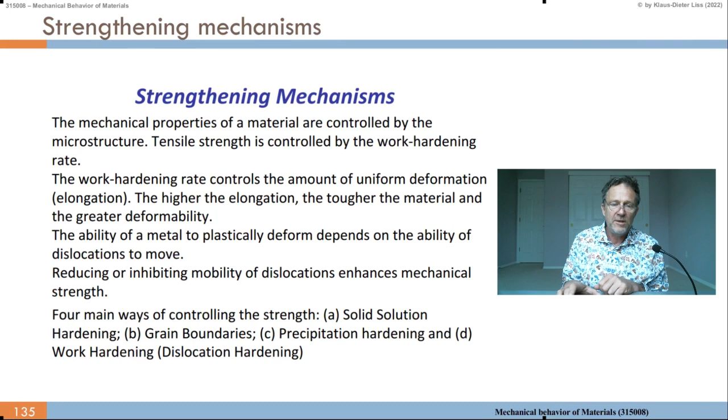Today I like to emphasize the dislocations. So how to achieve the highest strength? First of all, we can eliminate all defects, because if there's no defect in the material, like in a whisker, in a single crystal, then we first have to nucleate a dislocation, and that nucleation needs to overcome some energy barrier.

Crystals without defects and of very high strength have been achieved in whiskers. Whiskers are flaw-free materials with cross-sections of the order of a few microns, and they are some of the strongest materials produced by man. Some representative examples are provided in Appendix 1 of this publication, Strong Solids.

There are iron whiskers, for example, where the experimental strength sigma is 12.6 gigapascal. There's a patented steel wire with 3 to 4 gigapascal strength. Then we have the strongest bulk material steel at about 2 gigapascal. And most conventional steels have strengths in the megapascal regime.

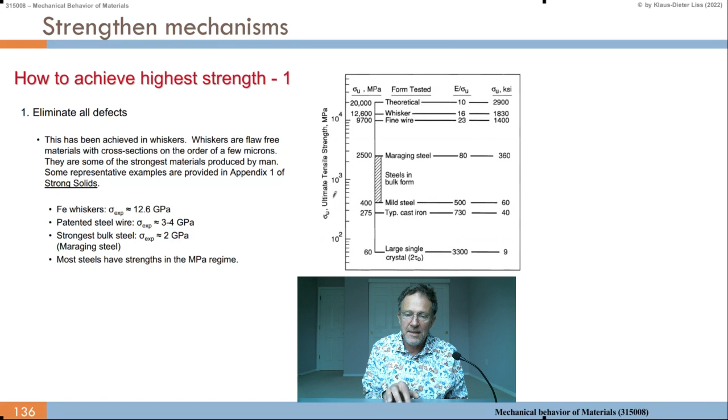That is also shown here in the table to the right, where we list for various metals, on the logarithmic scale to the left, sigma u, the ultimate tensile strength in megapascal. We see a large single crystal has a UTS of 60 megapascal. Then the typical cast iron is 275 megapascal. The mild steel is higher, 400 megapascal. And now we come to the Maraging steels, which are martensitic high-strength steels in bulk form, and they can spread between 400 and 2500 megapascal.

So here we go into the gigapascal regime. A fine wire can have 9700 megapascal, so 9.7 gigapascal. The whisker has 12.6 gigapascal. And the theoretical limit, I think for steel, is 20 gigapascal. We know the theoretical limit is not achieved because we get dislocations.

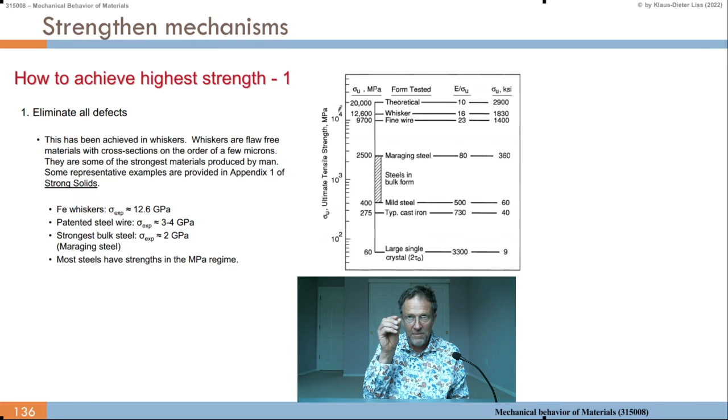As said, the whisker is some of the strongest material, because we have a relatively thin wire-shaped crystal and need to nucleate dislocations at the surface. If we look at the surface to volume or surface to cross-section ratio in the whisker, we have a large surface energy, and therefore the nucleation of dislocations requires large activation energy, so we get high strength. In the single crystal, once we have a dislocation per area or per volume, the surface does not play so much a role, and that's why large single crystals have a small UTS. If you compare 1 over UTS times the elastic modulus, we get those numbers here, and the smaller the better.

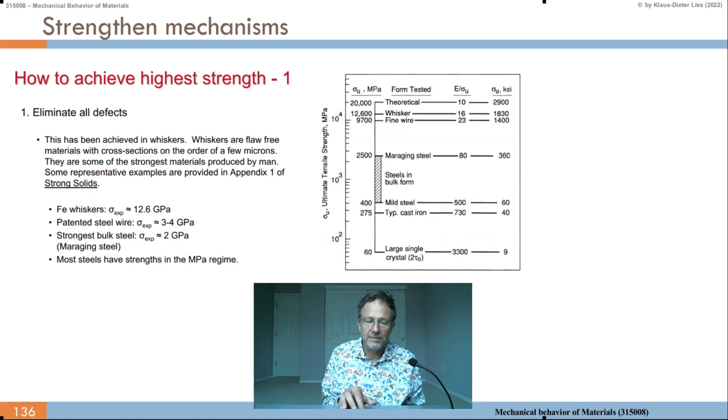The strengthening mechanism is we create so many defects in the crystal that they interfere with each other, for example dislocations. The principles behind strengthening mechanisms are work hardening, precipitation hardening, solid solution hardening, and transformation hardening. In work hardening, if we have a crystal lattice within the microstructure, then we get dislocations here and there.

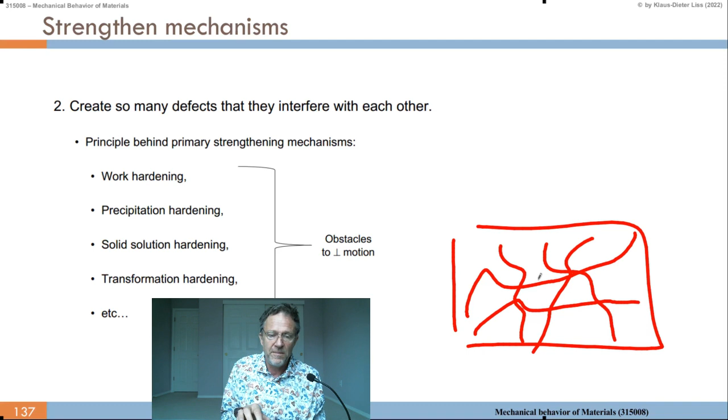Eventually the dislocations interact with each other. We know they repulse or attract each other, so they align, and when they cross each other, you need some energy to overcome. Eventually these dislocations entangle and cannot move anymore, or it becomes more unfavorable energetically to move.

We can also put precipitates into the crystal lattice. If we have a dislocation line coming through and moving in this direction, it cannot move over the precipitate, or it needs a lot of energy to go over it. Sometimes it has to climb, and we know climb at room temperature is difficult. It has somehow to go around.

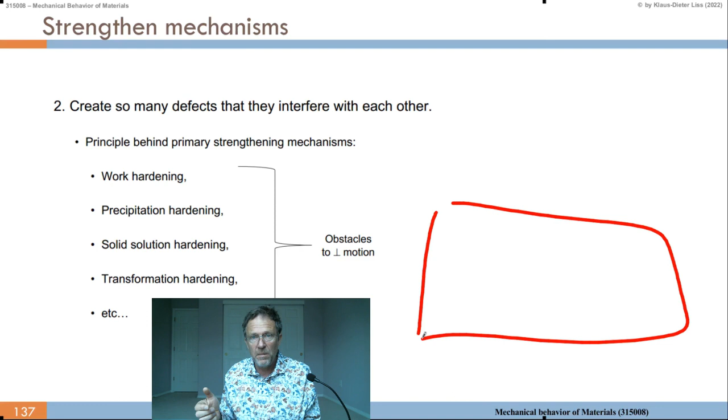Then we have solid solution hardening. We can have a solid solution, dissolving some impurities in the alloy. If we have iron, we can put carbon in, and then we have a dislocation. The carbon goes on interstitials, so the carbon will precipitate into the strain field of the dislocation. It accumulates around the dislocation, because if you expand the lattice, where you have a tensile strain, you have more space in the interstitials, and that's where the carbon would go.

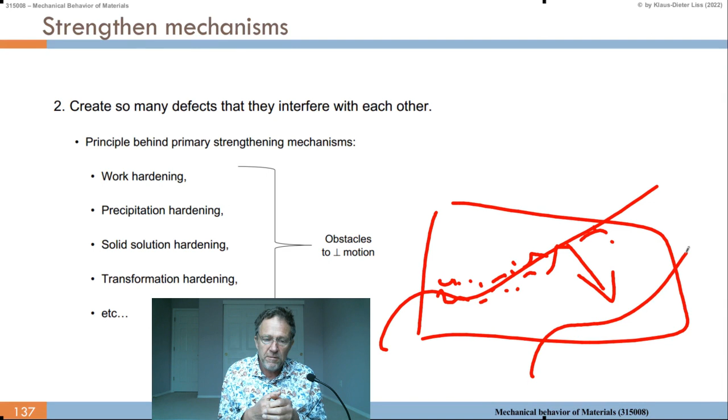So now, if you want to move the dislocation, you first have to overcome this cloud of solutes, which move by diffusion. By mechanical movement of the dislocation, by shear, you need to overcome this widened lattice, which you may want to compress in the next state as the dislocation moves on. That's more difficult because there's carbon sitting, so it's harder to move.

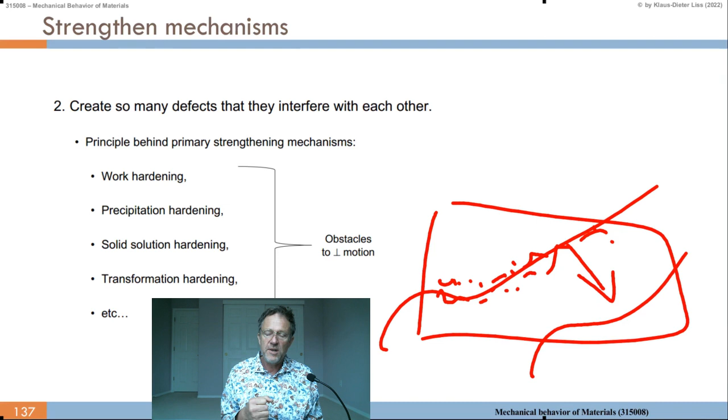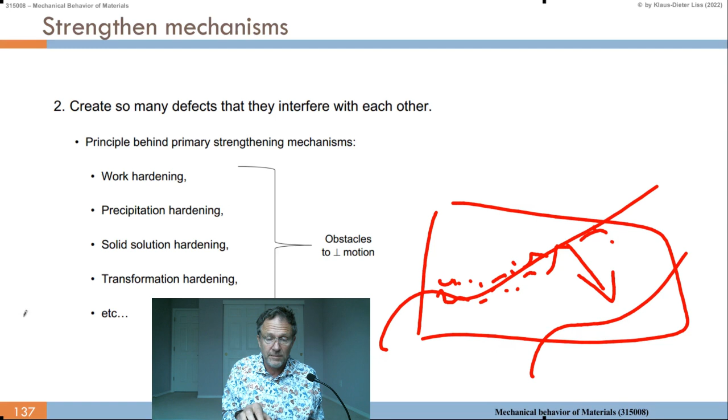Then there's transformation hardening. We can have phase transformations, like martensitic phase transformations I mentioned already, where we change the crystal structure. Grain boundaries also play a role. So the general rule: the strengthening of plastic deformation in crystals results from the restriction of dislocation motion.

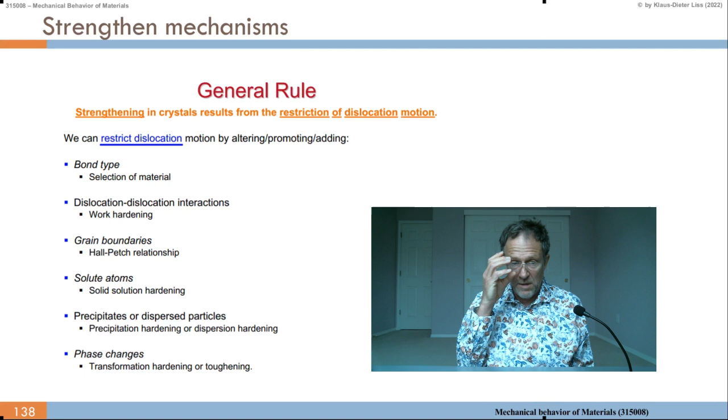We can restrict the motion by altering, promoting, or adding the bond type. If we have an FCC lattice, aluminium, and then we say okay, we take titanium aluminium, then we have titanium aluminium intermetallic bonds, and they make the material stronger than pure aluminium. So you select the bond type.

Then we have the dislocation interaction, which is the work hardening I mentioned already. Grain boundaries: the grain size plays a role, because if the grain is smaller, you have more grain boundaries in a given volume. That gives the Hall-Petch relationship I will talk about.

Solute atoms, I just mentioned in the slide before. Precipitates or dispersed particles: you put something in where the dislocation has difficulty going around. And phase changes: transformation hardening or toughening of material.

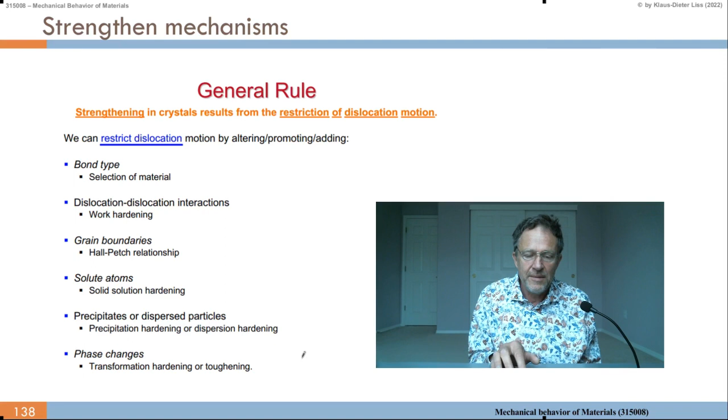How does bonding influence the strength? In this table to the left we have the weaker bonds, and here the stronger bonds. We know already the strongest bond is the covalent solid, like in silicon, like in gallium arsenide, and so on. Then I mentioned the intermetallics, titanium aluminide, which is between the metal bond and has some covalent character.

Then weaker, we have the ionic solids, so it's not the bond which plays a role, but the electrostatic repulsion and attraction between dissimilar and similar ions. We have the close-packed metals, which are the weakest, because these are just spheres packed together. The other metals may be a little stronger than the close-packed metals, because close-packed is just spheres. In FCC and HCP close-packed structures, the bonds are essentially non-directional, so the dislocation motion is easy. Examples: FCC metals like aluminium, nickel, silver, gold, all your favorite metals.

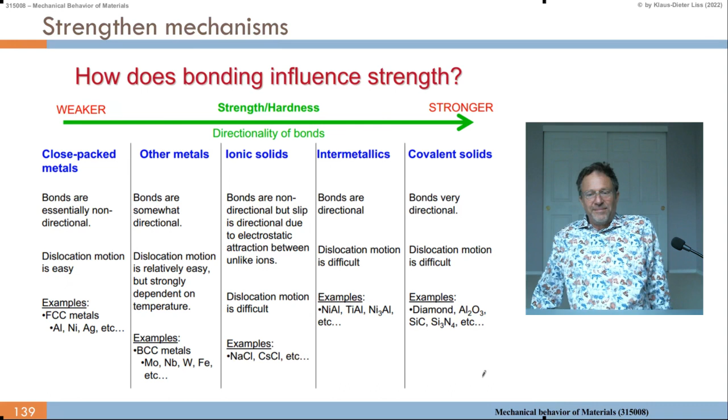So let's look at the general model for strengthening. There's a nice reference I gave here by L.M. Brown on strengthening mechanisms in crystals from 1971. Consider a slip plane that contains a random array of obstacles - we don't care at the moment what the obstacles are.

So we have the obstacles, which are the blue dots here on the slip plane, and then we have this dislocation line. Imagine a dislocation line at the bottom, which moves up in this direction under an applied shear stress tau, and eventually it hits the obstacles, getting pinned there.

Between the obstacles it can still move forward, but it remains pinned. So the dislocation line becomes longer because of the curvature - it bulges out, wanting to go toward the top of the graph, and it gets curvature and an angle in between.

So we need extra work to move the dislocation through the array of obstacles, and this results in a higher stress required to cause flow.

You can analyze that quantitatively by looking at the effective particle spacing and the critical angle to which the dislocation bends prior to breaking away from the obstacle. When the angle becomes too sharp, the two parts come together again, forming a new dislocation line and probably a ring of dislocation around the obstacle.

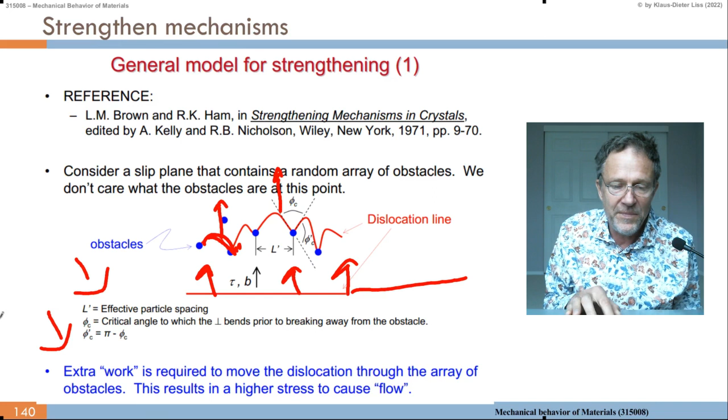So let tau be the shear stress - the flow stress required to move the dislocation through the array of obstacles, as shown here. This allows us to define stress in terms of the strength of the obstacle inhibiting dislocation motion: strong obstacles resist dislocation motion, while weak obstacles provide little resistance.

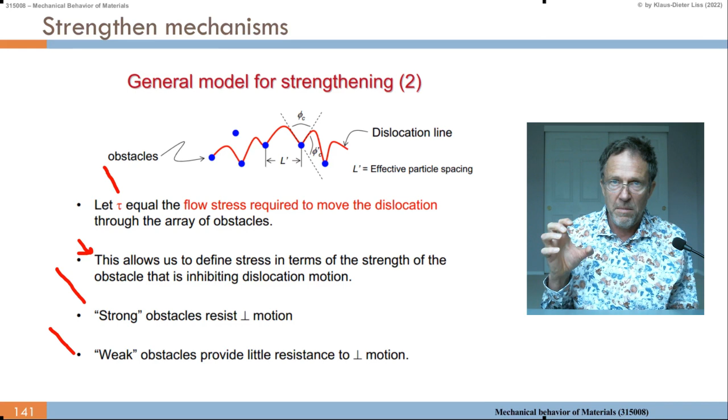A vacancy may act as an obstacle, with a little crystallographic potential for the dislocation, but it's relatively weak, so the dislocation just moves through it. A single solute atom is also relatively weak. But if you have a big particle sitting there, it's really hard for the dislocation to go around.

Here's a summary of the hardening and strengthening mechanisms for crystalline solids. Again we have the typical aspects: work hardening, the nature of the obstacle - here, other dislocations. Dislocations interact with other dislocations - they repulse each other, entangle each other, may attract each other, and it's relatively strong.

And the hardening law: delta tau, the increase in hardening shear stress from the undistorted material to the hardened material, equals alpha times some constant. Alpha equals about 0.2 for FCC metals and about 0.4 for BCC metals - this is a constant we can calculate, estimate, or determine empirically.

Then we have the shear modulus, of course, and the Burgers vector - for a larger Burgers vector we need larger shear force. And then it goes with the square root of the dislocation density, rho, which you see here.

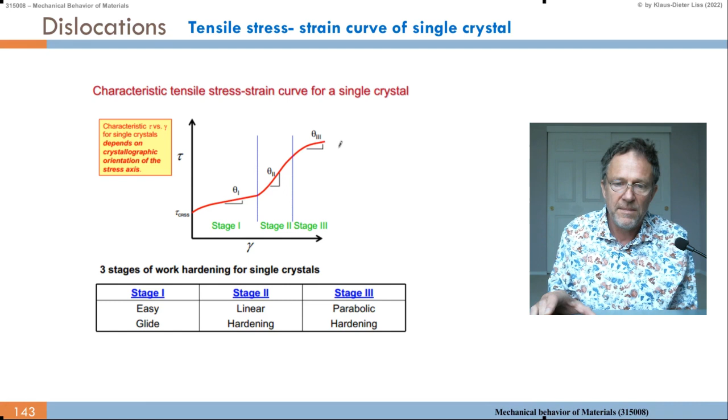The same is shown in this figure. Stage 1 is easy glide with a single slip system. Stage 2 has a high constant hardening rate, with multiple slip systems, nearly independent of temperature and strain rate. Then stage 3 has a decreasing hardening rate, with cross slip, and is very sensitive to temperature and strain rate.

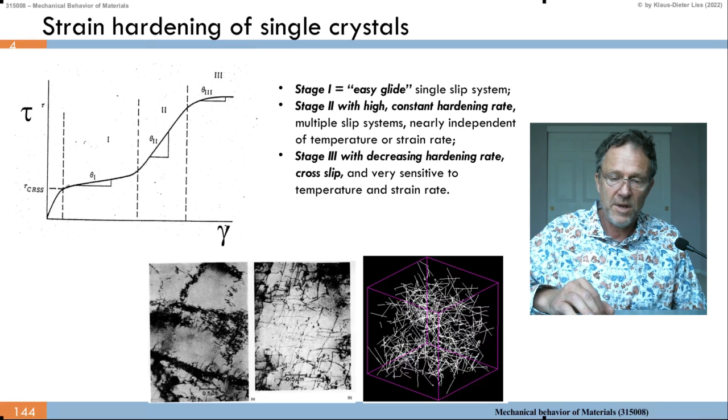This is because we may need some climb of dislocations to go around each other in this big entanglement, this spaghetti. To go around each other you need diffusion, or may need some diffusion aspects. So if you go to a higher temperature, it may become much easier than at lower temperature.

The ability of a metal to deform depends on the ability of dislocations to move - that's what we're talking about. Restricting dislocation motion makes the material stronger; not much new here in this slide. Ordinarily ductility is sacrificed when an alloy is strengthened - also evident, right?

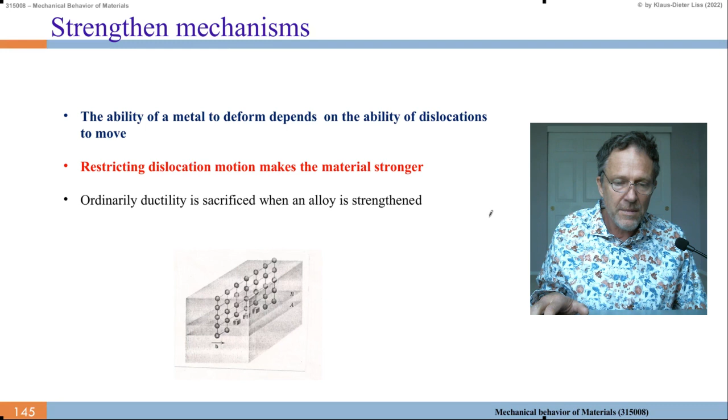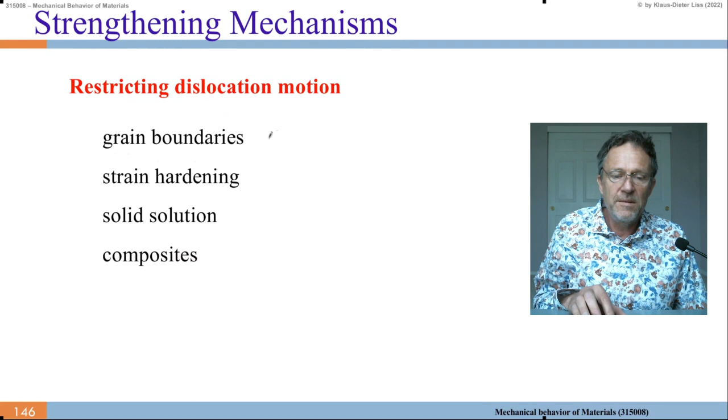Ordinarily, ductility is sacrificed when the alloy is strengthened. Let's look at restricting dislocation motion by grain boundaries, strain hardening, solid solution, and composites. Let's go to the grain size effect, where we look into the pile-up mechanisms of dislocations.

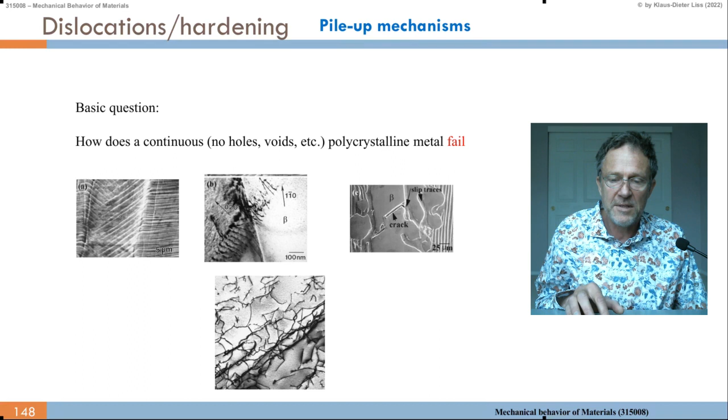Basic question: how does a continuous polycrystalline material fail, which has no holes, voids, etc.? We get the introduction of dislocations, maybe also twin planes, and they accumulate, eventually forming micro or nano cracks where dislocations concentrate. These planes or regions of high concentration of dislocations make it very hard for dislocations to move. If you further apply shear stress, it may lead to a crack—first a nano crack, and then they can grow to larger macroscopic cracks.

So we need to accumulate the dislocations in the grain boundary. Let's say this is a grain, and it has a typical diameter D. If you put a Frank Read source here—you know the Frank Read source, which expels dislocation loops—these dislocation loops move out, and the next one follows, and the next one follows.

How far can they move? The first dislocation can move until it hits the wall, until it hits the grain boundary. Then the next dislocation comes and lines up behind the first, either at 90 degrees or 45 degrees, depending on the sign of the dislocation. They attract each other and line up in lines—we have seen this, these dislocation walls, studied maybe two lessons ago.

How far can it move? Until it comes close to the first dislocation. If it comes too close, the energy of the two dislocations becomes larger. If you put one dislocation with double the Burgers vector in, the energy becomes 4 times larger, since energy increases with the square of the Burgers vector. So if you put two lattice planes together, the Burgers vector would be 2b, and the energy would be 4 times the energy for one dislocation.

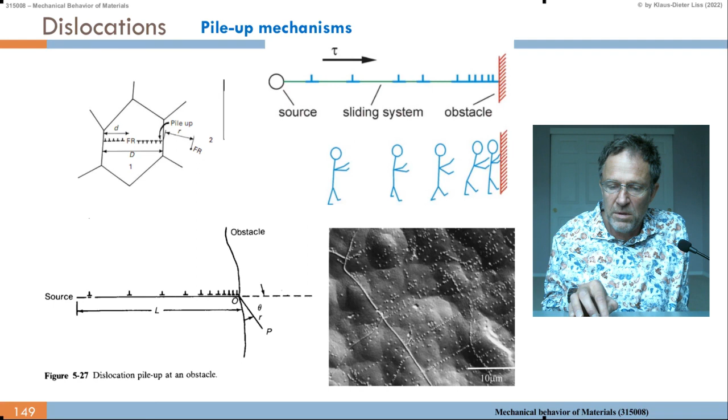So if you have a number n of dislocations in a pile-up of length L at a planar boundary, remember that tau is proportional to G times B over R. We construct this giant dislocation of many Burgers vectors, and we get n times GB over L. So here it's not a radial function anymore, it's a linear function, depending on 1 over L, not 1 over R, decorated by geometric terms: pi times 1 minus nu times L in the denominator.

But this is proportional to GB over R, and now we have G times n times B over R, and the geometric factor is pi times 1 minus nu over L, because now it's not spherical anymore, it's elongated. If you do the mathematics, it looks like this, and that gives you an extra shear stress.

So tau minus tau 0. Tau 0 is needed to move the dislocation at all, so that's a threshold shear stress. And then it becomes larger. How much larger is given by G times n times B divided by a kind of radius, a linear dimension which depends on the shape. And of course, if you compress in one direction, in the other dimension we have Poisson's ratio.

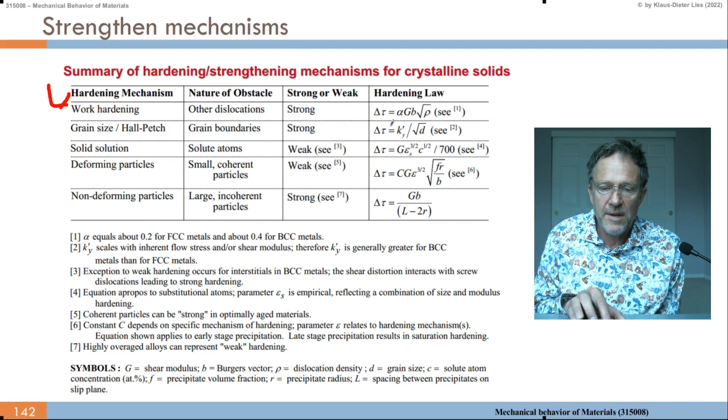I've shown it here in the table — not shown before, but now I show it. So delta tau equals K prime over square root of D. We put everything else into K prime. What we put in here are basically those constants. So we can plot it. The equation again is tau equals tau 0 plus K over square root of D. This is the Hall-Petch model, where D is the average grain size.

For a brass alloy of 70% copper and 30% zinc, the data is shown here. This is literature data based on experiment, and we see the square root of 1 over D plotted against yield strength in megapascals, showing very linear behavior. If we go to zero, then we have the initial yield stress tau 0.

If 1 over square root D goes to zero, that means the grain becomes very big, so we don't feel a grain size effect anymore — we just have the deformation strength of a large bulk single crystal, which is weak. As we make the grain size smaller, it increases linearly with 1 over the square root of D. This is the Hall-Petch model, and it applies to a large class of materials.

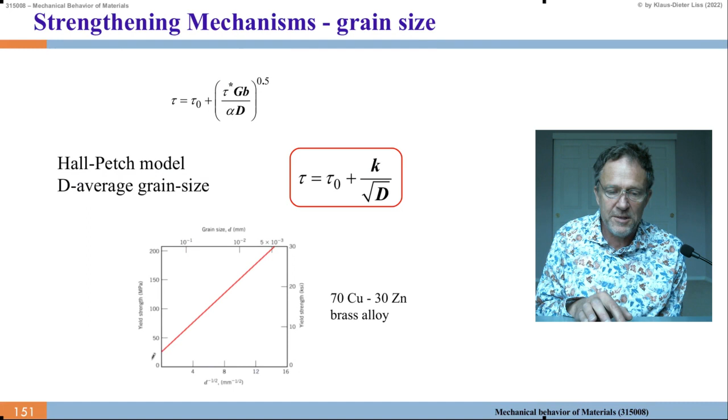For infinite grains, the yield strength is the intrinsic value of single crystal slip. Infinite grain size is here. Then we have the threshold shear stress we need to apply to move dislocations at all - it's not zero. And then for finite and decreasing grain size, the yield stress increases, as shown.

Here's the dislocation pile up. I mentioned there's a Frank-Read source. I've shown this schematic movie where you create a dislocation loop. It may go down somewhere or it may be pinned to something, and then it increases. In the next cycle it increases further, and eventually these two parts grow together, and we have one loop here in the plane.

Then it increases, and as these dislocations move towards the grain boundary, they pile up, as shown before, as demonstrated here again. Eventually that pile up gives a force, or back pressure - a shear stress annihilating the externally applied shear stress, and that makes the Frank-Read source stop. So the Frank-Read source stops emitting dislocations when the back stress caused by dislocation loops becomes sufficiently high to shut down the source.

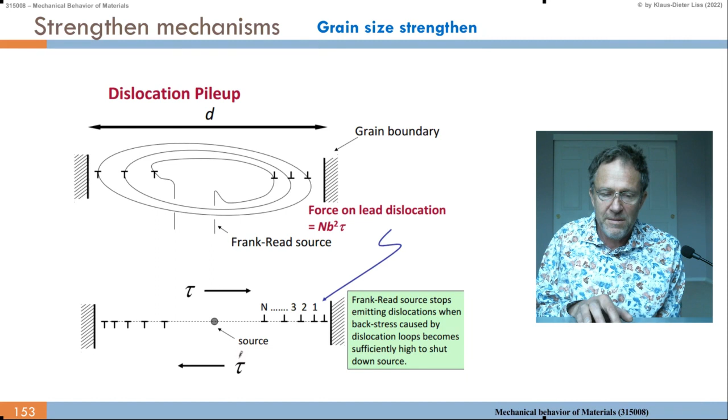The dislocation cannot move to the right anymore, or on the other side to the left anymore. Then no new dislocations would be created in the Frank-Read source, and it would shut down.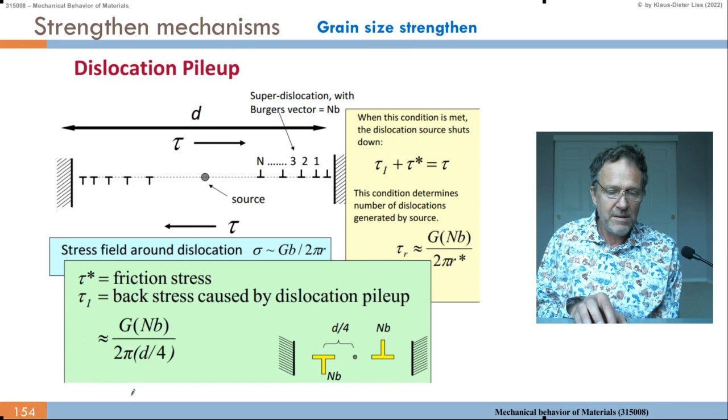So the grain size strengthening is shown here again. Physical picture: we get a force F star. The force F star is n times the Burgers vector - n dislocations pushing on each other. Here 3 of them push each other towards the wall, times the shear stress, or the difference - the exceeding shear stress above the natural, intrinsic stress, and that becomes pi d over 2g.

And from this force we can estimate the number of dislocations in the pile up of the super dislocation: it is pi times d times tau minus tau star, the exceeding stress over the intrinsic stress, divided by 2gb.

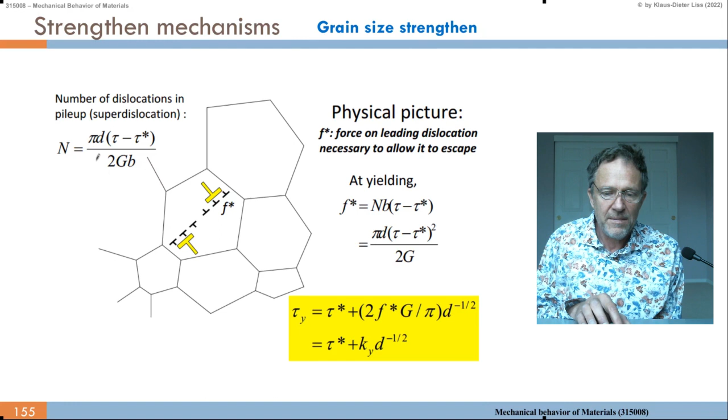Again, grain size strengthening. If we look at various data here, we have a fracture stress, a yield stress, and this is a fracture stress, and strain to fracture at minus 195 centigrade. So we see there is a temperature dependence of the strain to fracture at room temperature and at low temperature, and there are different points shown.

For example, here, very low, we just hit the yield point and then we fracture - this is brittle material. Then there we have some plastic deformation, so it yields and we have this nice Hall-Petch behavior. And then we get the necking in the engineering stress curve, so it flattens up, it flattens.

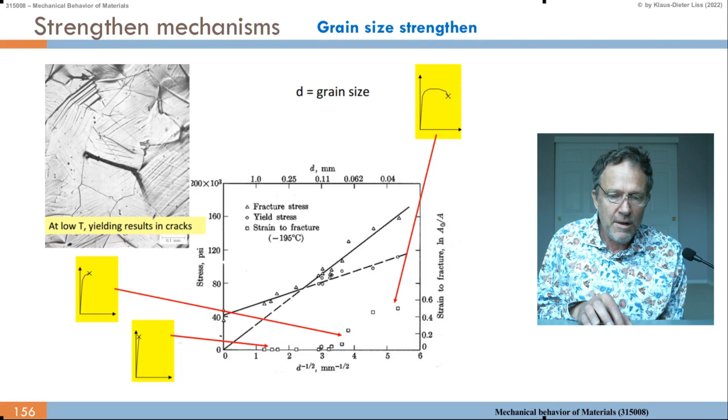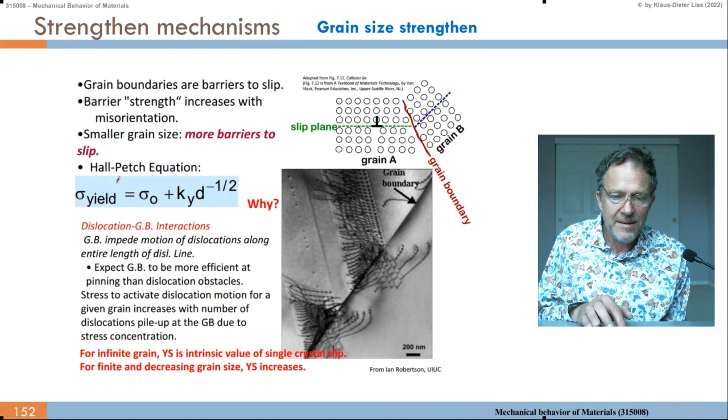So this figure again shows an example. I don't know what material it is, but the Hall-Petch plot here shows the length in millimeters to the minus one-half, so 1 over square root millimeter, that can be the diameter of the grain, and the yield stress here in megapascals.

So for very small numbers here, we have the length in millimeters there, so here 1 over square root millimeter, and the top scale shows the length in millimeters. They're both logarithmic scales. So if you have something like 100 millimeters, this is a big single crystal. Here we have 1 millimeter, and this is 10 millimeters.

So if we have a big bulk single crystal, we now have the yield stress, the internal yield stress. But then, as we go into this regime of, let's say, smaller than 1 millimeter or just half a millimeter or so, to a few micrometers, so 10 to minus 3 here, millimeter is 1 micrometer. In that regime, we have this linear behavior on that scale. So this is the normal Hall-Petch regime.

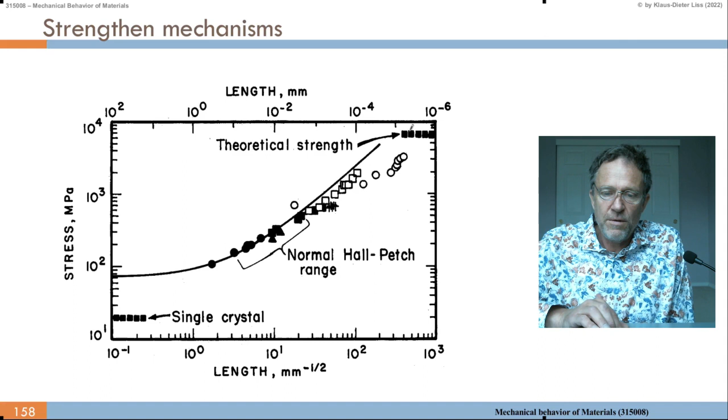So let's look more into work hardening. If you have many dislocations, we can make this model here. The shear produced by the passage of many parallel dislocations gives us steps at the surfaces, each one Burgers vector. And we have many of those steps, sometimes we can have 2. We call that the Taylor model of interactions among dislocations.

And that gives us the following plot, namely we have here the shear stress in megapascals and the dislocation density per square centimeter, and we see this linear behavior.

So it also depends how many slip systems we have. Just for 1 slip system we get the round points here, there's 1, there. Then 2 slip systems, triangles to the bottom. 6 slip systems, triangles to the top. And for polycrystalline materials we have these squares here. So this is an average dislocation density as a function of resolved shear stress for copper.

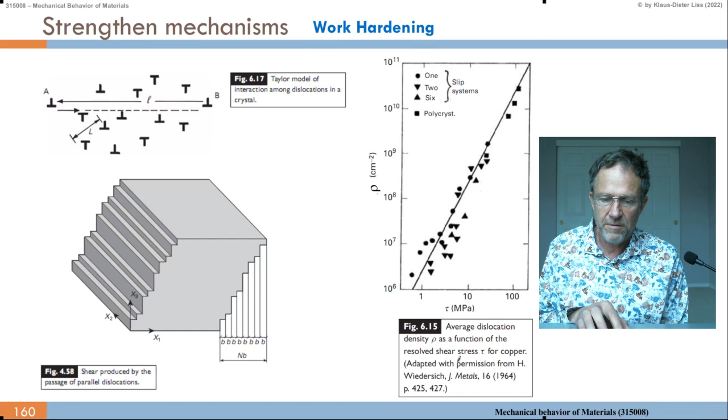We have the yield point phenomena. So if we have an annealed material, say annealed copper, then we get a sigma yield 0 for the first strain stress testing. So we go up here, this is elastic behavior, then we go plastic, and then we unload and end up here. So this is our plastic strain as we know it, and we count that from 0.002. So if we don't unload and we continue further from the 0.002, this is just a convenient number so that we can estimate when it starts to yield.

So we call that point sigma yield 0. And then we unload here, and then we take the material and do the same strain stress curve again. Then it would not follow like the first one here, but it follows higher up. So it follows approximately the point where we have interrupted.

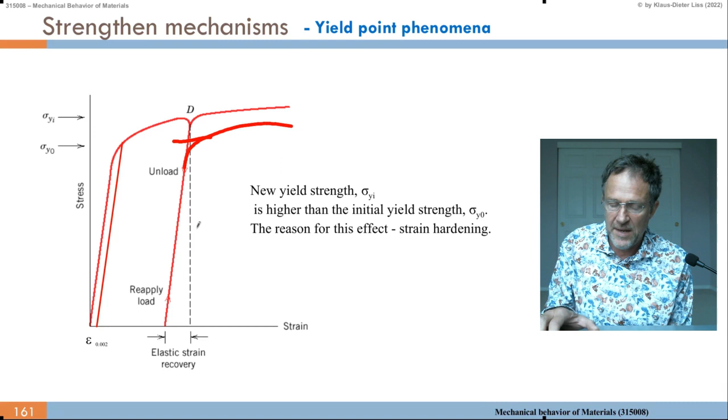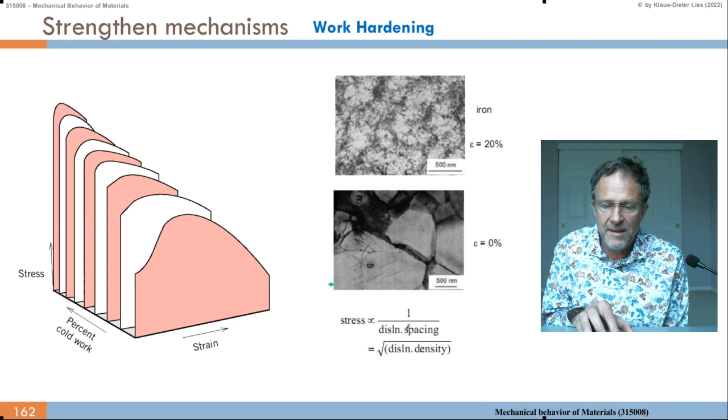So the stress which I can apply is proportional to 1 over the dislocation spacing, which is proportional to the square root of the dislocation density.

That's another interesting phenomenon: the Lüders band. So we have the perfect crystalline, annealed polycrystalline material here, and then we pull, so we get elastic strain and a yield. Then it yields, and when yielded, it becomes weaker.

It becomes weaker because in that low carbon steel we have carbon atoms sitting at the dislocation. As I said before, with solutes you can have segregation of the solutes, or segregation of the carbon in the strain field of the dislocation. Because if I put the carbon here, it takes more energy since there's less space.

Here also less space. If I go far away from the dislocation, this side and that side are the same. But in the vicinity of the dislocation, there's more space on one side and less space on the other side. More space than the average crystal structure exists close to the dislocation in the tensile stress field, so the carbon goes there.

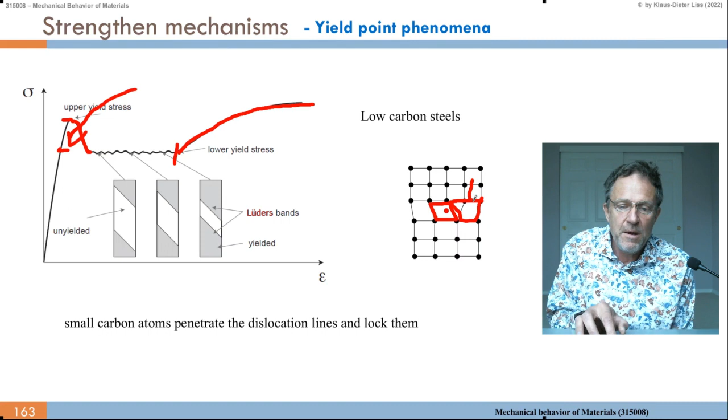That goes until the strain when all the white area is consumed—basically when the two gray areas touch each other and meet. Then I do the normal work hardening. So first, I need to overcome the barriers from the segregated carbon atoms. Then I have this yield front in real space, and they move together until the whole material is yielded, and then I get the conventional work hardening.

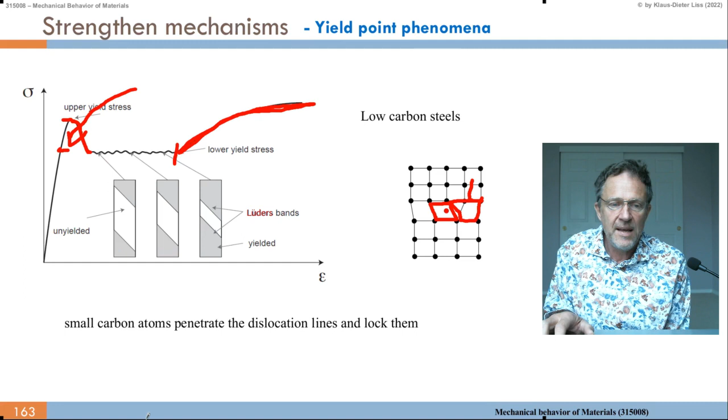So that's called a Lüders band, one of the gray areas. So what do we have here? Same thing: we get the upper yield limit, the lower yield limit, and then we do work hardening until here.

We unload and we load. We just continue the curve here as discussed a few slides before. Then at point Y, let's unload again. And now we wait. So we age.

After B, we age at room temperature or slightly elevated temperature. And then we pull again and we find there's another increase of hardness, with the upper and the lower yield limit, and another formation of a Lüders band. So what happened during the aging?

In the aging, we have diffusion of the carbon atoms within the crystal lattice, so time, diffusion time, and maybe temperature matter. Carbon goes interstitial, so it moves relatively fast back to the dislocation. If you do nothing, immediately unloading and loading, there is no time for precipitation or segregation of carbon, no diffusion time to go to the dislocation. But if we do aging, we make it old, we wait.

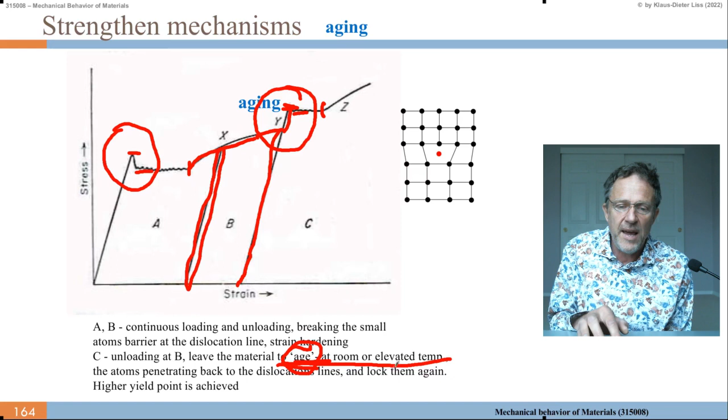So that's also a nice strengthening mechanism. After plastic deformation, we do the aging, which can be at a slightly elevated temperature to enhance the diffusion a little bit.

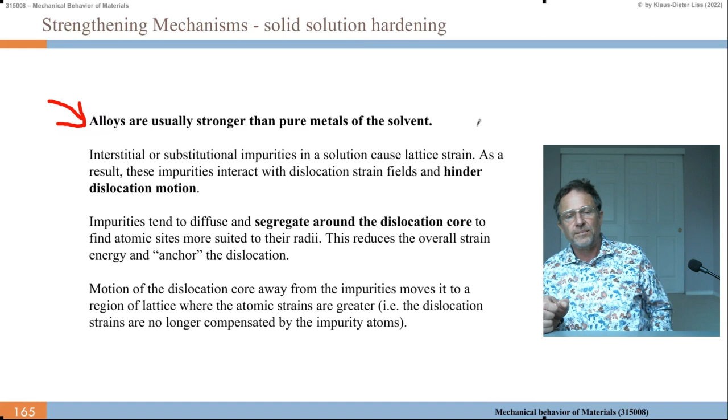And then we have solid solution hardening, telling us that alloys in solid solution, for example, are usually stronger than pure metals of the solvent. This is because we have either interstitial, like carbon, or substitutional impurities in solution, and they cause lattice strain.

The carbon interstitial widens or compresses the surrounding lattice because it needs space by itself. If you put other interstitials, it's a bigger effect. Or if you put a big atom, like gallium, into an iron matrix, then it expands the lattice locally.

If there's a vacancy moving to the big atom, then the probability is that the vacancy moves back again, and the big atom returns to its original position because of the surrounding strain fields.

So these solutes cause lattice strain. And as a result, the impurities interact with the dislocation strain fields and hinder dislocation motion, like I explained in the slide before on carbon and the Lüders band.

The impurities tend to diffuse and segregate around the dislocation core to find atomic sites more suited for their radius. So large substitutional atoms may go where there is tensile, positive strain, lattice strain areas. And if you put smaller substitutional atoms in, they may go into the compressed areas, where the lattice parameter wants to be a little smaller.

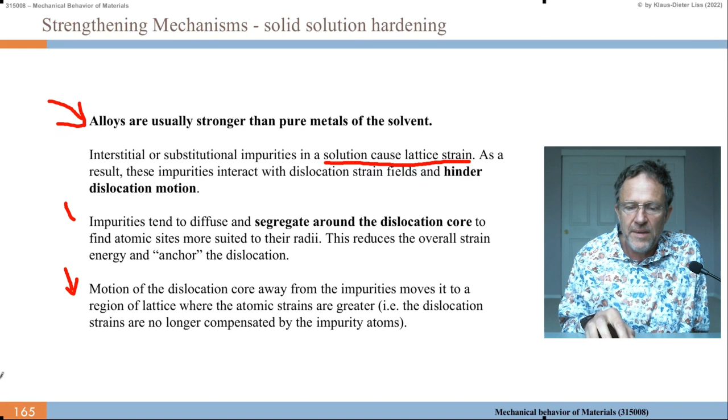So motion of the dislocation core away from the impurities moves it to a region of lattice where the atomic strains are greater, i.e. the dislocation strains are no longer compensated by the impurity atoms.

So here, smaller and larger substitutional impurities tend to diffuse into strained regions around the dislocation, leading to partial cancellation of impurity-dislocation lattice strains.

So here you see these are the lattice distortions as we had them in the dislocation cores. This is a small substitutional atom, so it wants a smaller lattice parameter, which is in a compressive stress field around the dislocation. And here is a larger one, so it wants a larger lattice parameter, and that larger lattice parameter you find in a tensile stress field around the dislocation, below the dislocation.

This is a vacancy, and this is the interstitial. The interstitial also wants to push, so it needs more space, so it goes into an area where there are already tensile stresses. And what's here? Well, they put two in here.

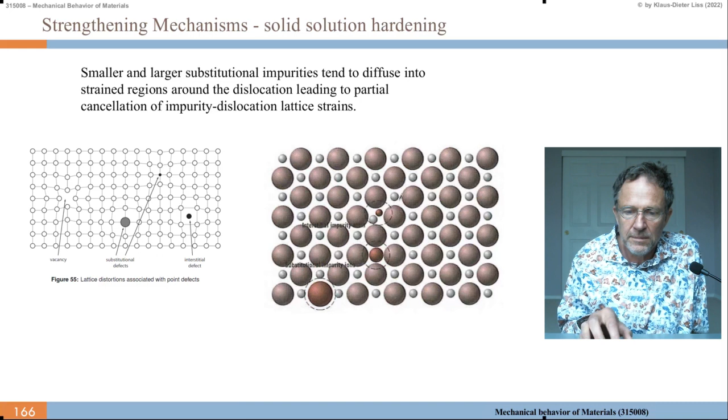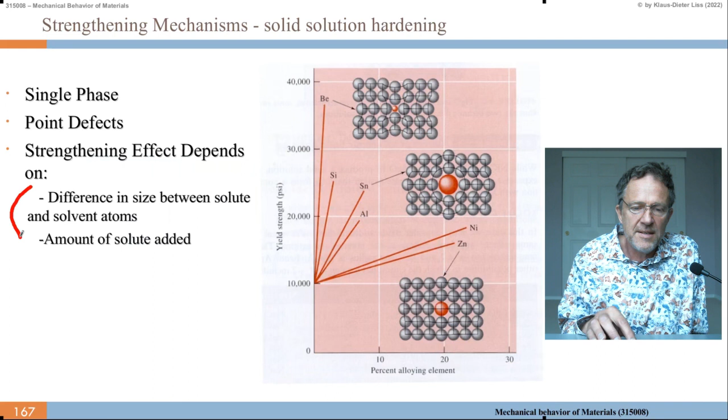It also depends on the difference in size between the solute and the solvent atoms, and of course the amount of solute you add.

Another figure here about the strength, hardness, ductility, electrical conductivity, and creep resistance, for percent zinc in copper. This is solid solution strengthening and alloying. The increase in percent elongation is not typical of solid solution strengthening.

Here we see the yield strength, and we see the electric conductivity goes down. Why does electric conductivity go down when I add zinc into copper? Because electric conductivity is motion of electrons, and electrons are waves. So electron waves, when they hit a zinc atom, get scattered. They're not going continuously and homogeneously through the crystal lattice. They get scattered from the zinc atom, and scattering means in all directions, not just the forward direction, also in the back direction, and that's some resistance. So electric conductivity, you get electric resistance which goes up, or conductivity, which is 1 over resistance, goes down.

So scattering of electron waves by the solute atoms, zinc, gives scattering, and therefore they may be backscattered. Instead of going in the forward direction, they go in the back direction, against the electric field, then they have to turn around and accelerate again. So electric conductivity goes down, but the yield strength goes up, tensile strength goes up, and percent elongation also goes up. So it's always physics, nature, engineering - there are always compromises. Conductivity goes down, but mechanical properties go up.

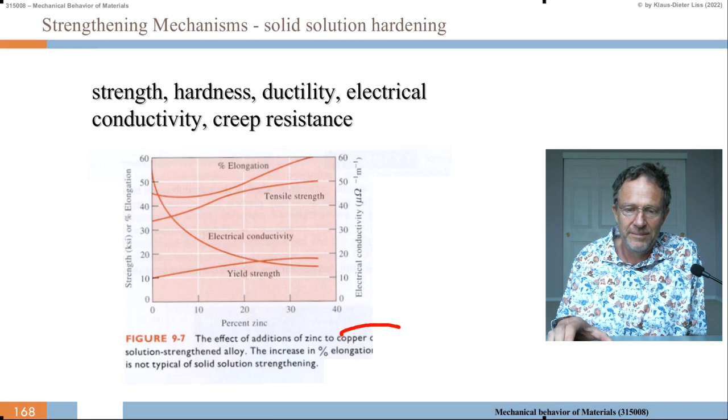When the solute exceeds the solubility limit, we get 2 phases. We know that already, and we can have many situations here - hard precipitates in soft matrix, or soft in hard, and we can have spheres or needles. On the right hand side we have poor mechanical properties, on the left hand side we have good mechanical properties. Poor because at the tip of the needles we have stress concentrations.

Stress concentrations may lead to cracking, yielding and cracking, so this becomes poor. Also, if the included material is soft, the crack can go right through it. If it's hard, the crack would be held by the hard material. So if a crack goes through here, it just goes through the soft material, but if a crack goes through the soft matrix, it may hit a hard precipitate, and that makes the properties better.

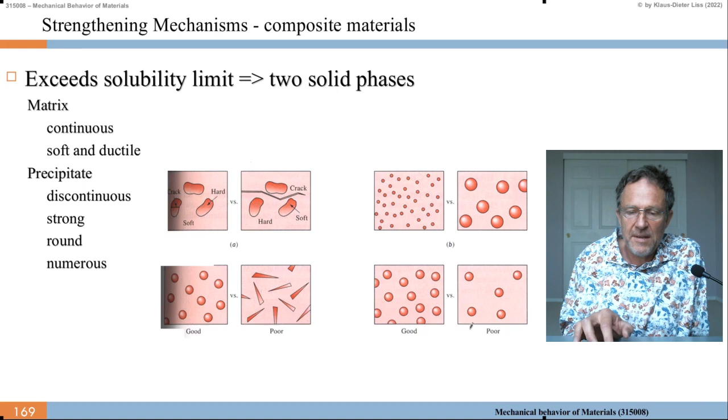Or here we have the size of the precipitates. We get good properties if we have small precipitates and many of them, as compared to large precipitates and not so many. Or comparing precipitates of the same size, more precipitates give you better properties rather than just a few precipitates.

So this is now the last chapter on strengthening mechanisms, namely composite materials. Composite materials means we take layers, building up materials in layers. Here are the individual layers of one material, white material and gray material, alternating. We can bake them together, glue them together, bond them together by intermetallic bonding, by rolling, by various fabrication methods. Then we can have two situations.

Either we apply a compression or tensile stress perpendicular to the stacking, so along the normal of the stacking, or here parallel to the stacking, so in plane to the stacking or perpendicular to the plane of the stacking. That leads to the Voigt model and the Reuss model.

And these models are shown here. So the strain in the Voigt model is when I stress the material and strain it vertically, then of course the two strains have to be the same. If I compress the white material, I also compress the gray material by the same amount. This is epsilon 1 equals epsilon 2 equals epsilon.

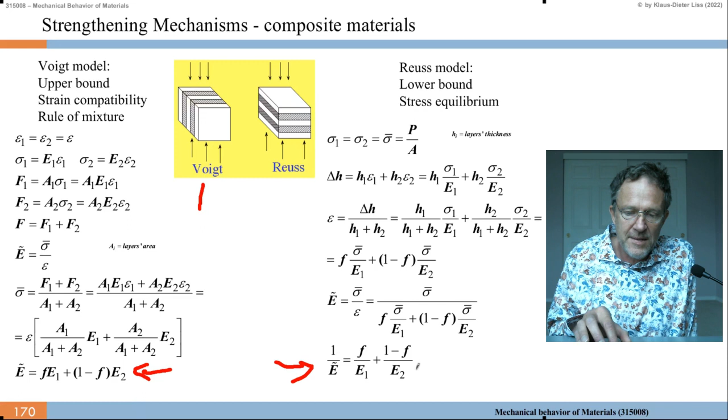If we look at the strengthening mechanisms of composite materials, here is the Voigt behavior. In the Voigt behavior we have the volume fraction and the Young's modulus, volume fraction is F. Voigt is just a linear behavior, so E is linear in the volume fraction. And here E is somehow related to the reciprocals of it, so if you solve it for E, then it becomes this model.

The Reuss model is compared to the Voigt model. And then there exist other models like the Hashin-Shtrikman bounds for G with Poisson's ratio 0.3. So we haven't put the Poisson's ratio in, we haven't put the shear modulus in, but they play a role of course. If you compress here, you also get a lateral expansion due to Poisson's ratio, and this is different in the white and in the black layer, so that's where Poisson's ratio plays a role.

And then when you have a difference in expansion between the white and the black, you get a shear between the white and the black, and that's where you get the shear modulus in. That gives you two boundaries closer to the Voigt situation. In the Voigt situation, you compress here and you widen laterally, but when you compress, you may also get shear stresses because you have different elastic moduli at the layer.

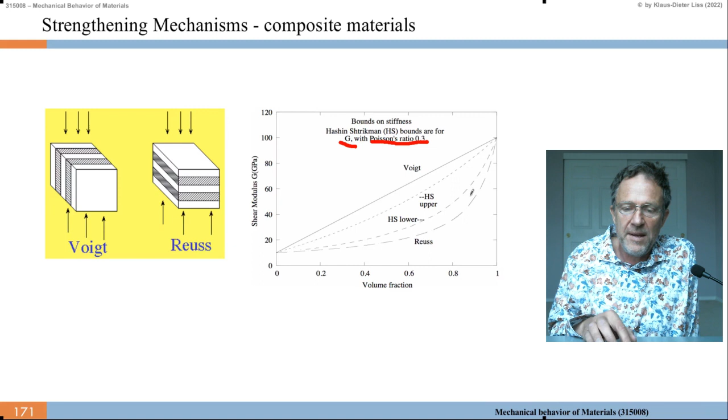With this, I conclude the lesson on plastic deformation with dislocations. We will hear more about it, we will apply it here and there, but next time we come to fracture of materials, or maybe the next few times, and then we come to creep of materials, where dislocations also play a role.